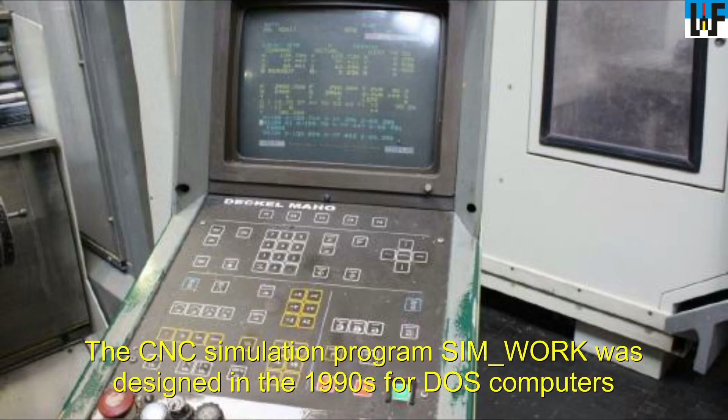The CNC simulation program SimWork was designed in the 1990s for DOS computers and emulates a Philips 432 control. Since then, numerous users have already taken their first CNC steps with SimWork.

Because SimWork operates as a so-called stickware, the settings on your own PC remain unchanged. Furthermore, the configured stick works on any Windows PC, which is a great advantage, especially for learning purposes. SimWork is offered for download together with the emulator DOSBox in a self-extracting zip file and can be downloaded from the World of Manufacturing download page.

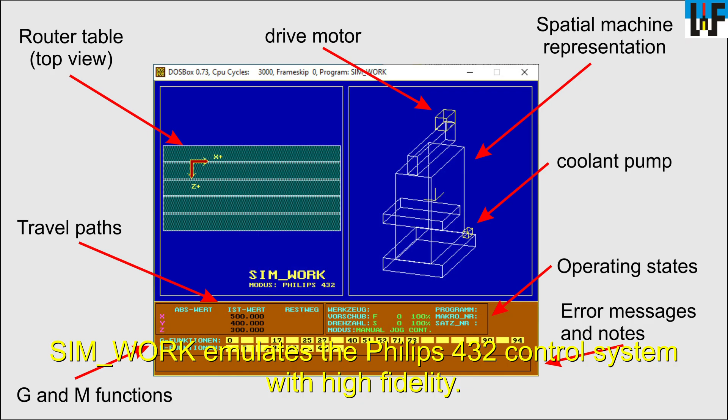SimWork emulates the Philips 432 control system with high fidelity. The machine body is shown in a three-dimensional representation, making it easy to follow the machine movements. And the top view of the milling table allows you to see how a workpiece is machined.

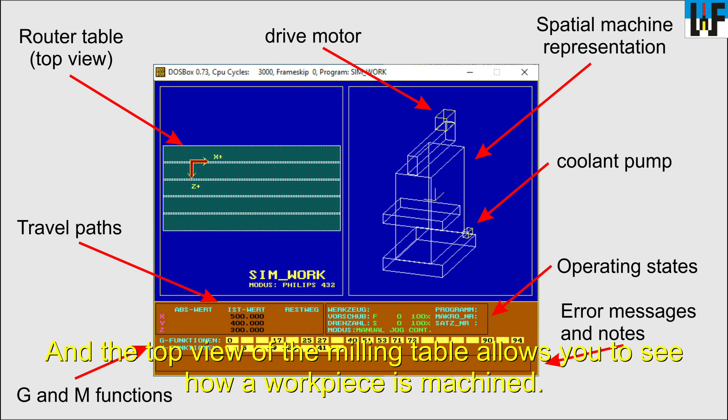After downloading the self-extracting file, simply double-click on the file name to unpack all the files contained therein. You can specify the target directory into which the files are to be extracted. After unpacking, you should see this directory image. Now go to the DOSBox directory and double-click on dosboxportable.exe.

Double-clicking starts the DOS emulator and allows input at the insertion point or cursor. To make the USB drive visible to the DOS emulator, it must be mounted using the mount command. You must also enter the command sequence F:, CD SimWork.

After pressing the return key, drive Z is still active. Therefore, F: now switches to drive F. The command CD SimWork then changes to the directory in which the SimWork exe file is hidden. Now the program SimWork can be started by typing simwork.exe at the cursor position and then pressing the return key.

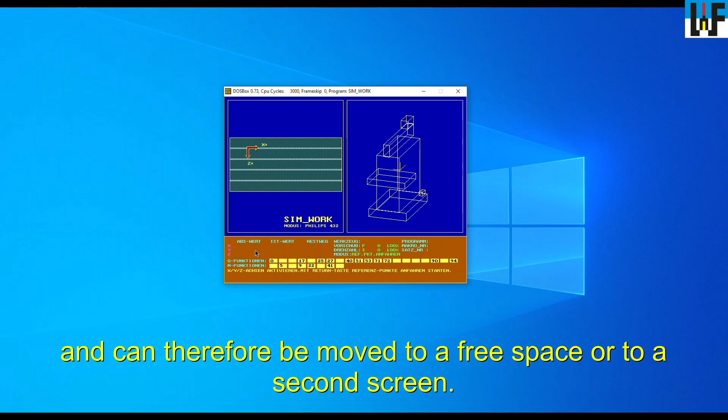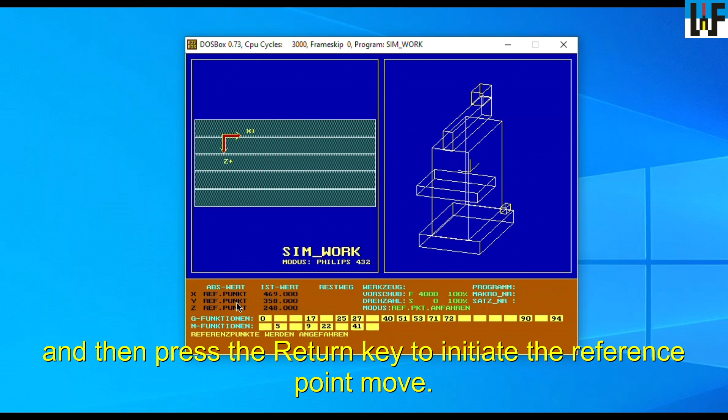CNC machines typically need to first move to so-called reference points after being switched on so that the control system's measuring system is calibrated. Since SimWork simulates a real control system, calibration is also required for this simulator. To do this, press the X, Y, and Z keys in sequence, and then press the return key to initiate the reference point move. The actual values of 500, 400, and 300 mm for the X, Y, and Z axes show that the reference points have been approached correctly and the control is now ready for operation.

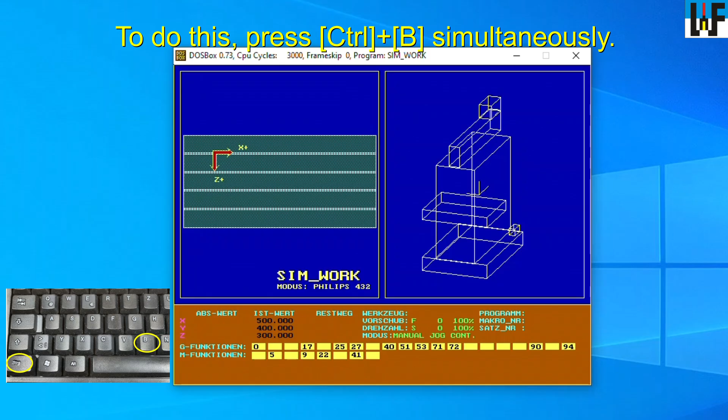To enter a CNC command, SimWork must first be put into teach-in mode. To do this, press Ctrl+B simultaneously. The available modes will now be displayed in the message line. Then press the M key for teach-in. Commands for a program can now be entered. The permitted letters are displayed.

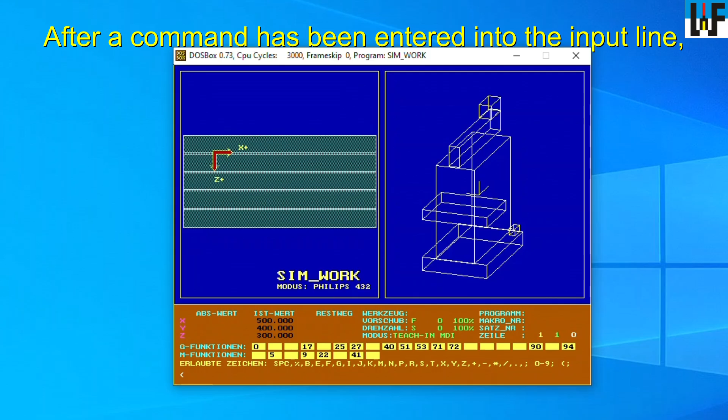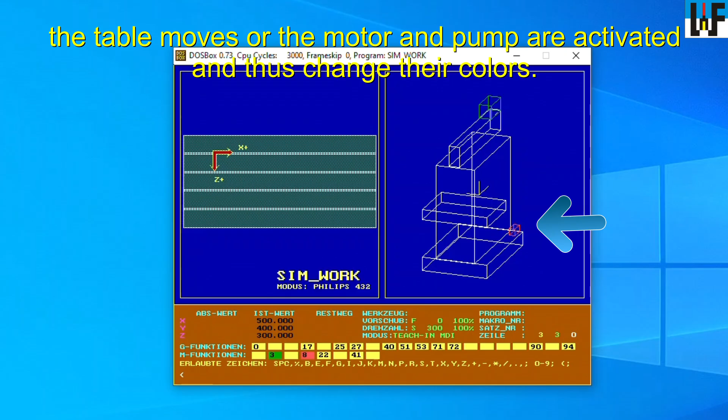After a command has been entered into the input line, the effects of this command can be controlled immediately, as, for example, the table moves or the motor and pump are activated and thus change their colors. The activated M functions are also identified in the corresponding function bar and the spindle speed is displayed.

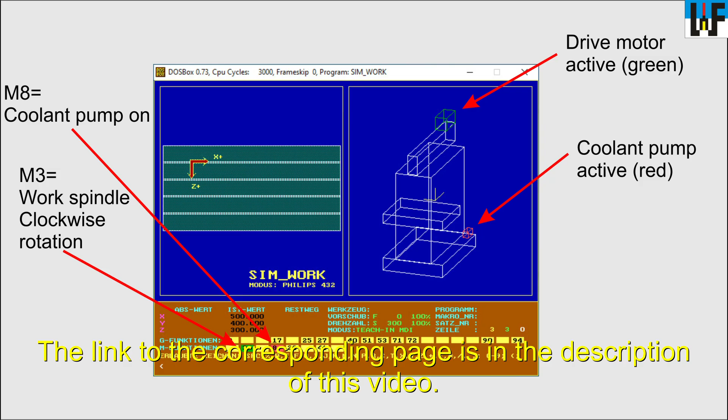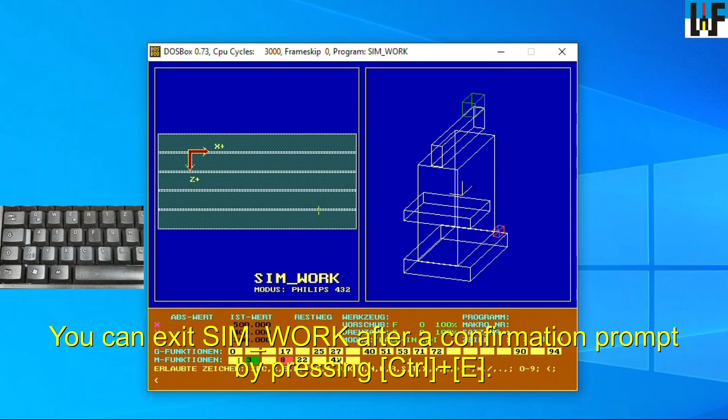The SIM_WORK editor can be opened using the keyboard shortcut Ctrl+K. The previously entered commands are stored there and can now be edited. The cursor can be moved using the arrow keys. Press the Escape key to exit the editor. You can exit SIM_WORK after a confirmation prompt by pressing Ctrl+E. Afterwards, you can simply exit the DOS simulator by clicking the Close button.